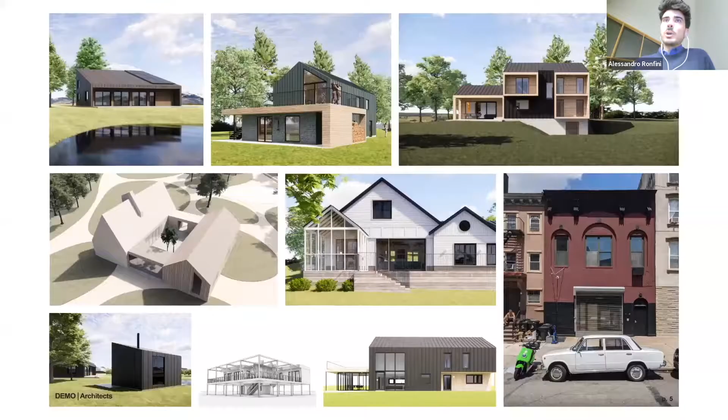So Demo Architects, we have a lot of projects, but for the most part, except for my house and another house, they're still in construction, because as all of you architects know, it takes a lot of time to actually build a portfolio of built projects. Having started in 2019, 2 years are definitely not enough. But we're working on a lot of interesting projects and passive houses right now, for the most part in upstate New York. So it's very exciting, future looks bright so far.

So this house - in 2017, my wife and I decided to start looking for land and build a house. The idea was that we couldn't afford an apartment in New York City, nothing bigger than a studio. So we thought, why not look for land and build something bigger? It's an investment, it's going to be a fun project, and maybe one day we'll move there.

So after camping on the property for quite some time, and being Italian, I cannot not have my moka, even on a campsite. We finally decided where to put the house, and we finally conceived an idea for the house.

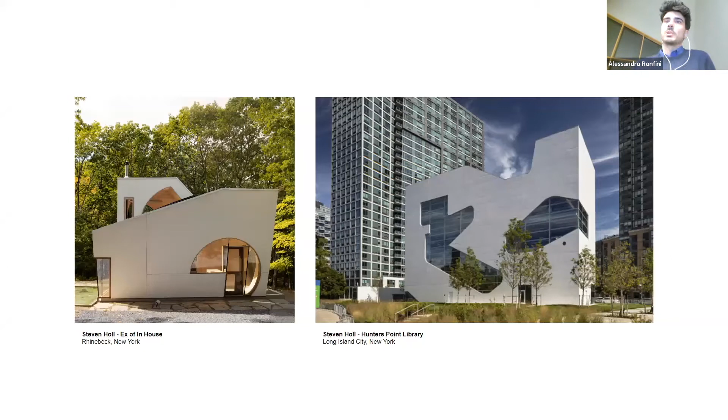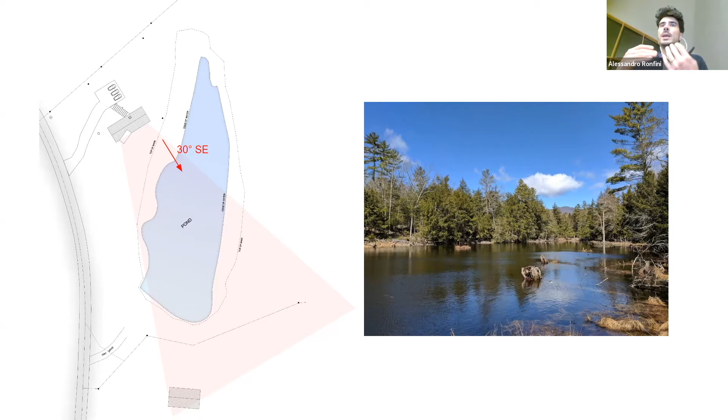So the idea for these carvings on the building was to actually justify them in a way that was relating the building to the site, and also in a way that could organize the interior and exterior space.

So the house is oriented 30 degrees southeast. It's kind of like the maximum angle we could put it at in order to still get some view of the pond and not miss out on the sun exposure towards the south.

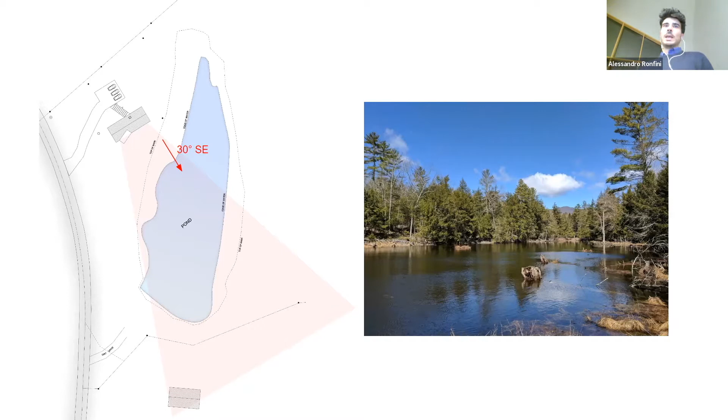At the same time, on the south here, the only neighbor is in sight, and of course they have a view of the pond there. So we wanted to maintain some privacy, still very far, but nonetheless we wanted to not point the view directly onto the neighbor's house.

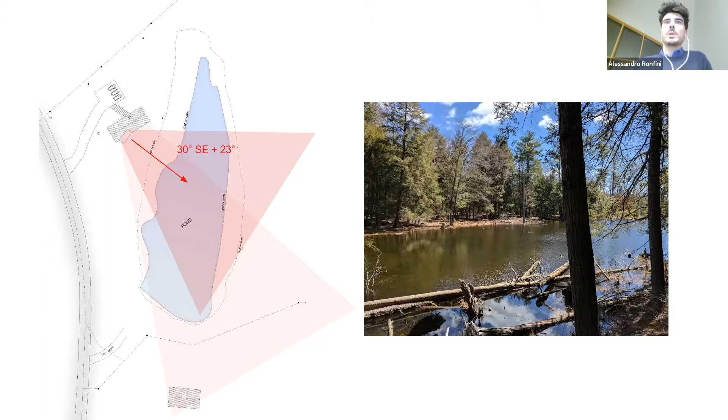So what we decided to do is carve out this wedge shape out of the house, out of this very simple volume, at an angle of 23 degrees from the actual axis of the house, in order to orient the view directly onto the pond, so that this interior space sitting on that side of the house can look straight out onto the water without seeing the neighbor and without the neighbor seeing inside the house.

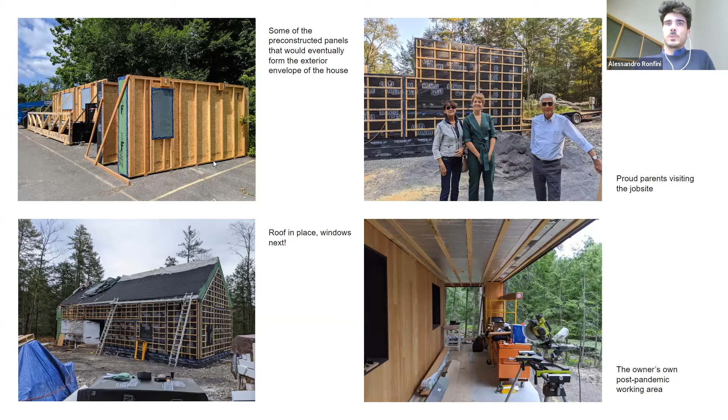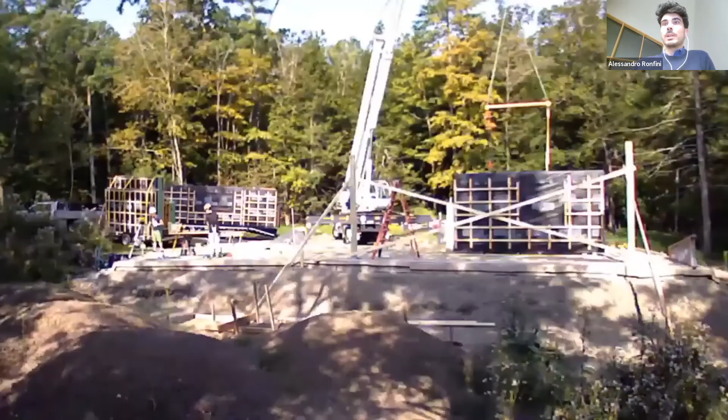I'm going to talk about exactly how they're detailed. So all the panels were built over the span of a couple of months, and then construction, for the most part—all the ground floor, and the second floor except the roof—was installed in a span of 3 days.

This is a camera that I set on site, so you can see the setting of the panels. It's not going very smooth, but it's happening. So all the panels, there we go, second day.

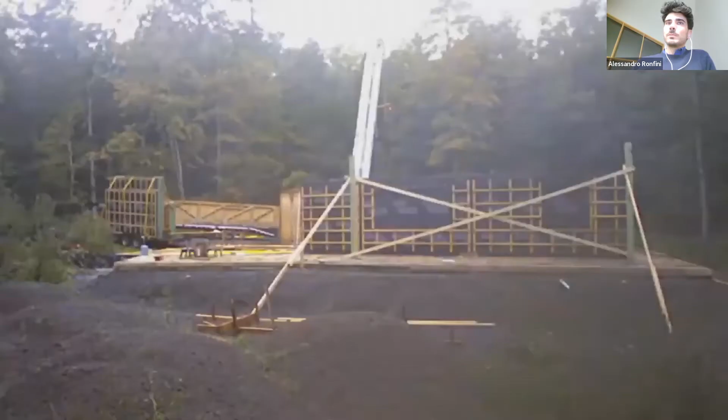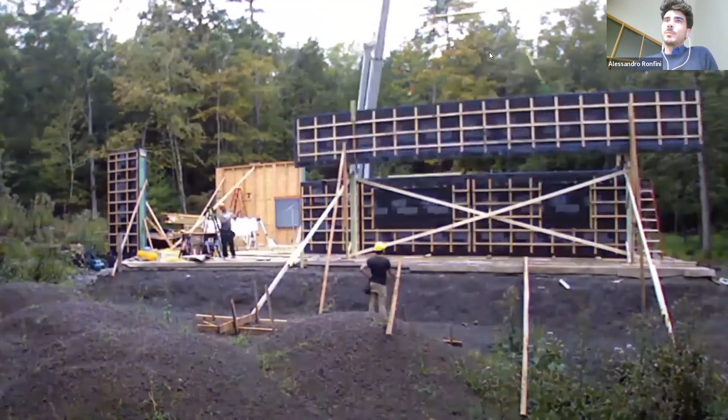Again, all the panels were prefabricated in Kingston, which is roughly 25 minutes drive from the project site. So really close by, not a lot of travel distance. Built locally in a way. And there you see the big beam over the porch on this side.

So onto the details of the construction of these panels. The panels are pretty standard, there's a lot of panels very similar to this. They are built with 2x4 interior structural framing, zipboard as an interior air barrier.

That's the use of zipboard—I know in the passive house community it's a little controversial. In this case, it was actually a good way of resolving the detail because it's both a sheathing and an interior air barrier. So it helps a lot with avoiding any risk of condensation on the exterior or in the insulation sandwich, and it serves as sheathing material. So there's no extra material that needs to be added on top of it. It was cost saving and performance that drove that decision.

TJI outriggers—this house is kind of pushing the limit of how small a house can be and still be certified passive house. This is just short of 1,500 square feet interior area. So the walls are really thick, 16 inches of dense packed cellulose. It's driven both by performance and by the risk of condensation. So both things were in place here.

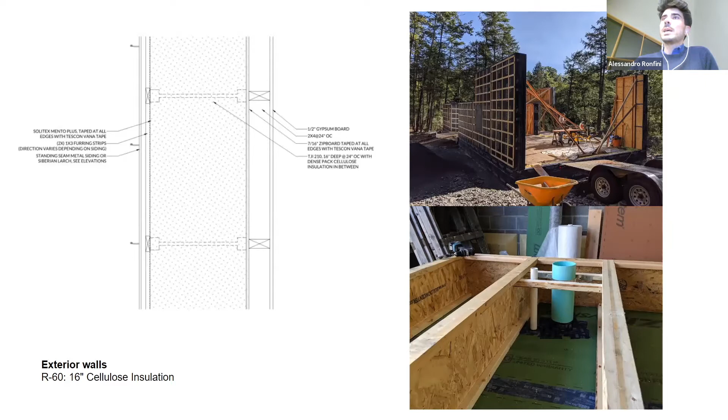And then on the outside, the Solitex Mento Plus, taped all edges, and then 2 layers of furring strips for the rain screen. The siding is a standing seam metal siding on most of the exposed surfaces, and everywhere the house is protected is Siberian larch.

For the roof, also because of the R value we had to hit, we decided to put exterior insulation in this case, so as not to oversize the joists on the interior and create additional structure that was unnecessary.

The rafters are 12 inch I-joists with dense packed cellulose, and on the exterior, again, zipboard as our interior air barrier. One thing I wanted to highlight with this picture is that it's not contained by your typical Intello or any interior air barrier, so it's allowed to dry to the interior. Once again, the zipboard is acting as the interior air barrier and as sheathing.

And then on the exterior, EPS, and on top of that, Solitex UM, which is a membrane with a mesh on top of it, so you can apply the metal roofing directly on top of that and maintain some circulation underneath.

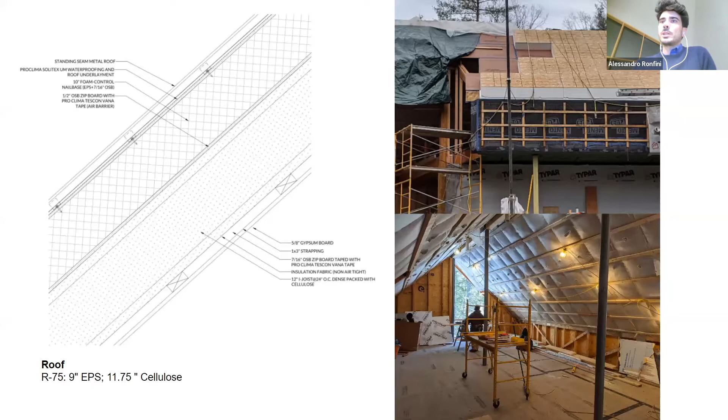The slab, finally—slab R42, sorry. The slab was all prefab EPS, I think from EasyFrame, EasyCore, something like that. So the whole pre-design was as simple as setting up construction with Legos, putting it all together, securing it in place, and then prepping it for the concrete pour.

The windows, another important component on the facade. The main element in the house is this big double height space with a big curtain wall. The curtain wall is a stick-built wood aluminum curtain wall, with wood mullions and pressure cap aluminum on the exterior. The windows are all aluminum-clad pine windows from Batimet from Germany.

These windows show a couple of things that unfortunately happened. The manufacturing was pretty good, but there were definitely some problems in some of the gaskets and how they were installed, so we had to fix that on site. Nonetheless, the quality of the window—and it's really hard to find at a decent price a welded face aluminum window—all the details in this were really great.

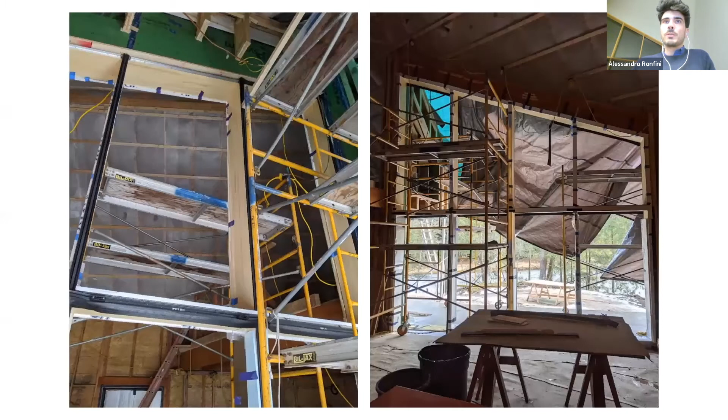So construction of the house, everything went relatively smooth until March 2020, when of course the pandemic hit, and there was a stop work order for most construction, or non-essential construction, in New York. So at this point, that's a picture from then.

So the interiors were kind of all wired, and all mechanical systems in place, but of course no finish on the exterior. We barely had started roofing on the opposite side, but not completed.

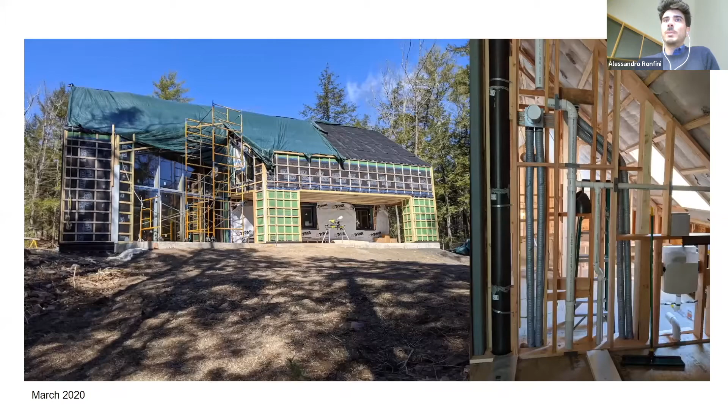So at that point, it was a lot of stress, but at the same time a very fun experience. We just asked friends to help, and my wife and I took on more work than we were supposed to. We were already planning to do some of the interior finishes ourselves, but we decided to do a lot more. So we did all the kitchen, we did the entire wood siding of the house ourselves.

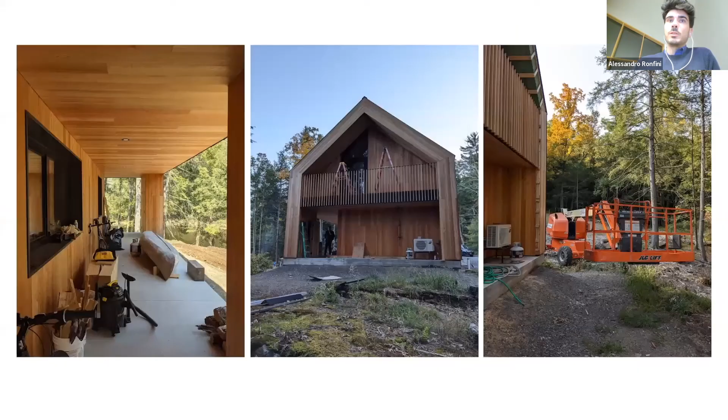We did the floors. So the siding was actually a fun experience. I have not really done a lot of woodwork, a few things, a few millwork fun projects here and there, but installing siding for an entire house is a different project, a little bit of an undertaking.

Had to rent tools like this guy here, but at the end of the day, it was fun. It was a great experience.

As an architect, I learned a lot by doing things — how to detail connections, what to expect and what not to expect in terms of tolerances, in terms of precision of the execution of the details. So even though it took much longer than anticipated and a lot more work and stress, it was definitely a fun experience and a big learning experience.

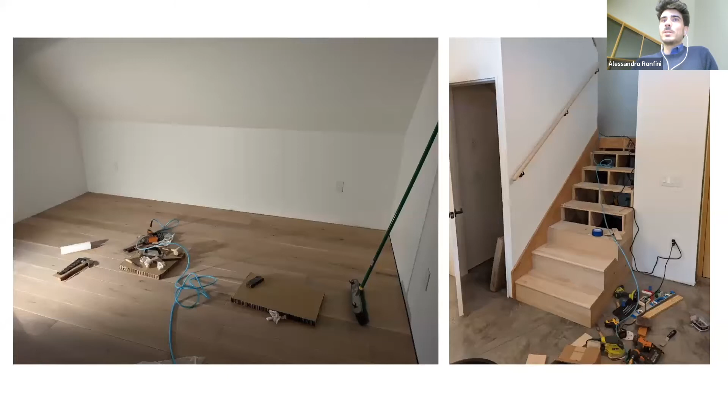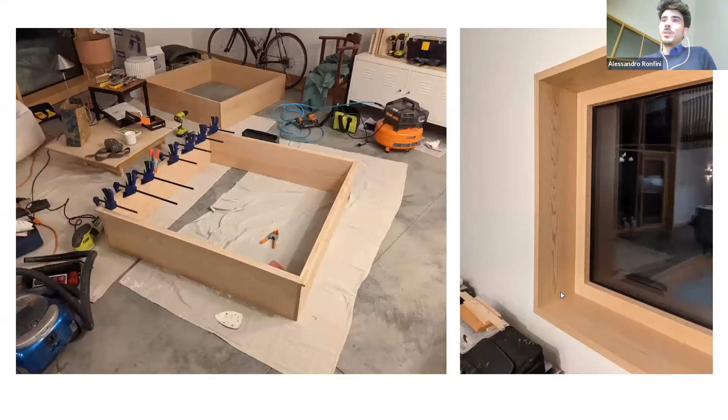The floors — please don't ever do floors yourself, or you're going to get very close to divorce. The stairs, I did those as well. Then we did all the casing for the windows. So this is all red oak.

Luckily, the couch was also very late, so we had all of the living room to ourselves to set up shop and build all of these boxes. We built them on the floor and then installed them onto the windows. Very proud of those. That was a fun project.

So here's the house, completed house. The house actually won at the latest PhiusCon the award for best project by a young professional. I was 35 at the time I started the project, but really the professional, and I have to credit him, is Owen O'Connor. He was the builder and the Phius rater, and he was 34 when we started the project, so under 35.

So the house is now finally complete. There's still a few things we're working on, some furniture missing here and there, but overall we're really happy with the result. It's been great as an architect to have a project that you complete, that you don't have to ask a client to visit with other potential clients. It's an incredible value, and this has been very successful in getting our company new projects.

On the interior, some fun things. This table, something that my wife and I designed, and the two legs here—there was an unfortunate mistake. One of the builders actually cut the ridge beam too short, one of the parts of it, so we had a 20-foot ridge beam. That was an expensive mistake for the builder, but also something they didn't want to bring back home, so we just cut it into parts and gave it to a friend who's a mill worker, and they used it to build the legs of this table. We still have some pieces that we're going to build more furniture with.

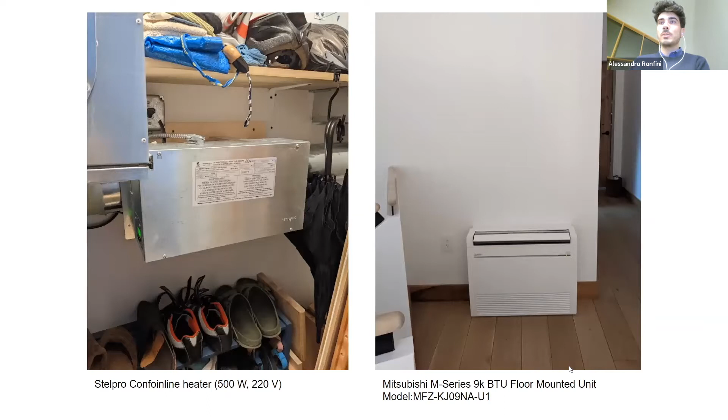In terms of heating and cooling, for cooling it's just one floor-mounted Mitsubishi mini split heat pump. It's 9,000 BTU, the smallest you can get, and still over-dimensioned for the system.

For heating, though, we also have an additional post heater, the Stelpro, that warms the ERV supply air to 67, 68 degrees, which is 4 or 5 degrees on average more than what comes out of the ERV naturally. That helps a lot keeping some of the rooms, especially the ones on the east and north, a little warmer in the winter.

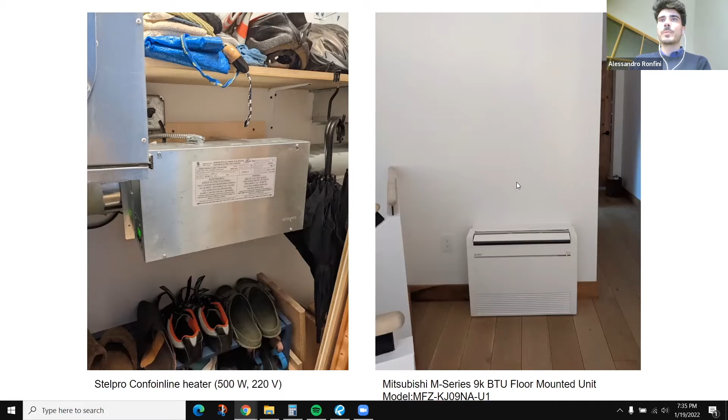For domestic hot water, that's another thing—remember, this is a second home, and it's pretty narrow in use. So after a lot of debate, I decided to go with a tankless electric water heater because I'm not using water all the time, mostly on weekends, and sometimes for a whole week. Even though there's a higher load when you're calling for hot water, in the long term this is actually going to be less expensive than even a heat pump water heater, because there's no tank that needs to be constantly filled and kept warm.

After the work was finally completed, sometime in May, we managed to test the house to achieve certification. We did the blower door test, and the results were great: air changes per hour at 50 Pascal was 0.27, with a target of 0.6. So really a very airtight house, especially considering how small it is.

Here's some data for the nerds on the call, the ones interested in all the details. We can go back to this and take a look if you have questions.

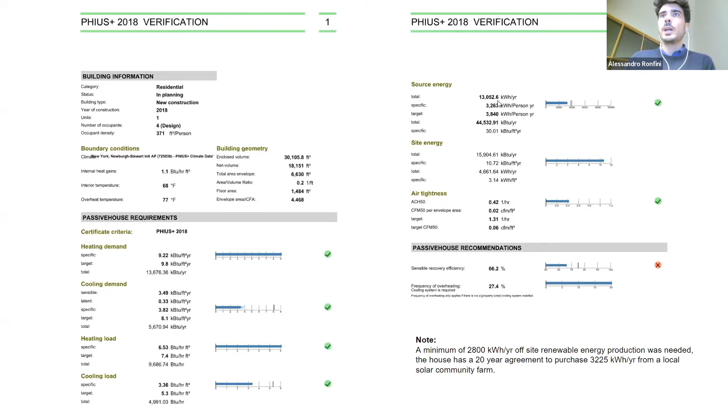So here's the data, and I wanted to point out some numbers. For example, the total source energy is 13,000 kilowatt hours per year. Since it's my house, I can see the bills. It's a second home, but I wanted to show the energy consumption of the house, even though I'm only here approximately 20% of the time.

For temperature, heating and cooling, despite no human load in the house, no windows open, and no shades dropped in summertime, the temperature was maintained over the past year. The house has had all mechanical systems running for a full year now. Temperature was kept at a minimum of 65 in winter and a maximum of 74 in summer, and you can see the consumption here.

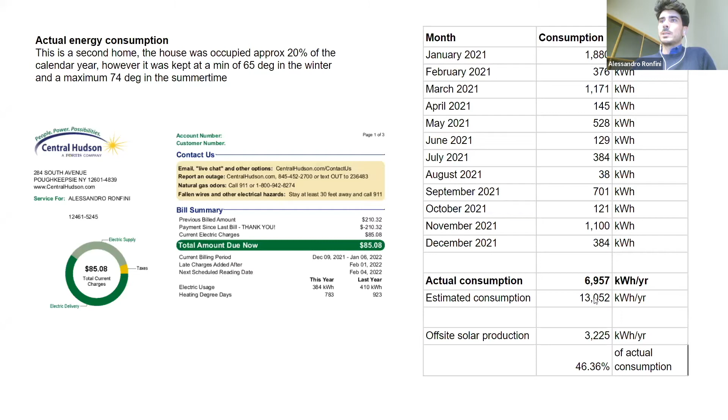As of 2021, actual consumption was just shy of 7,000 kilowatt hours, with an estimate of 13,000. 46% of that was actually produced with offsite solar production. So very happy with the result. Of course I wasn't expecting to hit 13,000 since it's a second home, but being at half that, it's a very good result, I think.

Another thing we all value in passive house is air quality, so I got myself a little air quality monitor. Not the best tool on the market, maybe not professional grade, and it's kind of annoying that it can't go back in time to extract data for just a month.

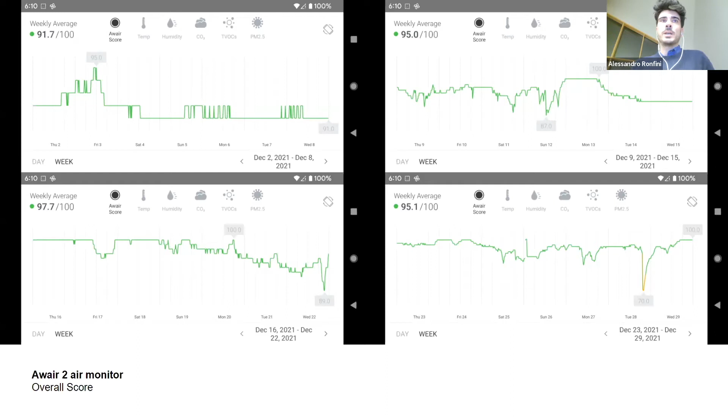But I looked at this past month, since I was here the entire month, and extracted week by week the data for the 4 weeks of December from the house. Here's the overall score, pretty high, minimum 91, top of 97. Of course there are always some peaks and lows.

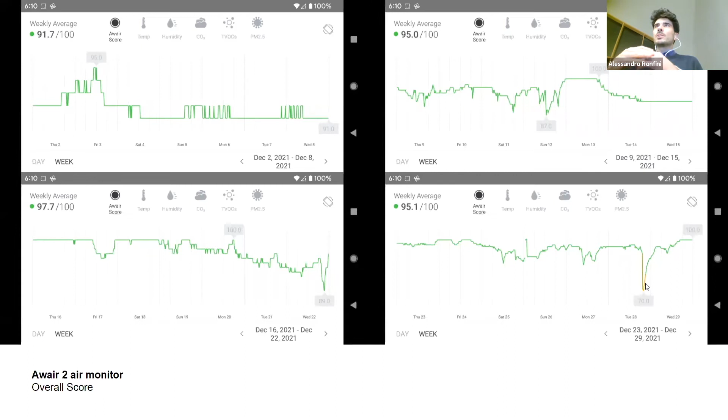For example, this drop to 70 might have been me cooking a steak or something like that. Small things like that can actually dramatically affect the value in these results.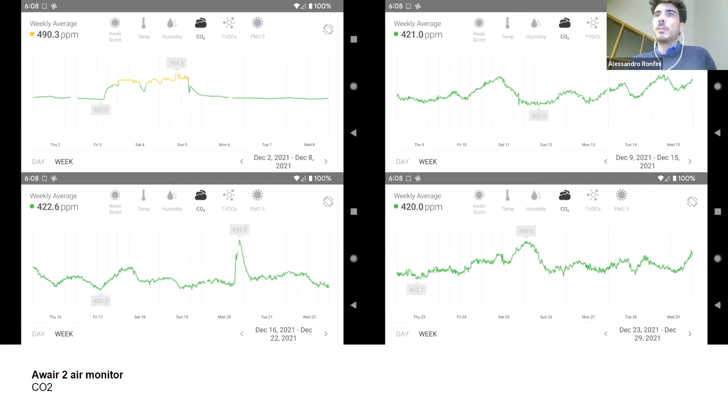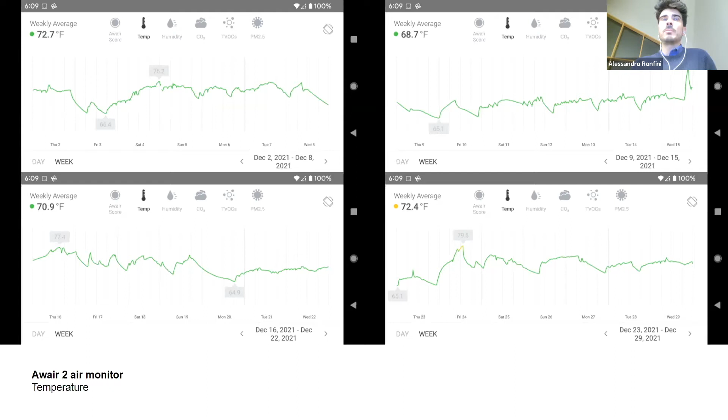And then the temperature - this is also pretty good. The median temperature oscillates a little bit, of course, but that also depends on where the sensor is located.

The data that's definitely not all green is the humidity. On average the house is dry in winter, and the reason is mostly because it's dry outside, and the house isn't always occupied - even though we're talking about a month when I was here - plus an all-air system to warm the house, which of course dries the air and creates slightly below ideal indoor humidity.

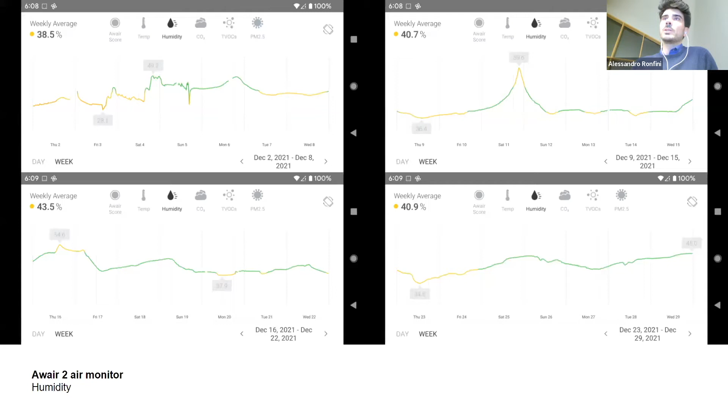So, some of the problems and lessons learned.

How am I doing with time? I have another couple minutes, probably.

Going good. Yeah, go for it, Alessandro.

There's a million problems and a million things I've learned in this house. I like to point those out to clients and say don't do it like that, that was a mistake. A lot of those are small things, like I should have had a bigger overhang over my entrance, and I maybe should have thought of a way of warming up the concrete at the entrance, because it gets really slippery when it snows and ice forms immediately on it. So a few things like that, design problems.

In here, I really wanted to highlight the passive house related issues that I encounter. None of them is a big problem, and actually I'm on the way of solving all of them, I think.

But one thing was definitely distributed temperature. The ERV alone, even though it was tested and calibrated - Zehnder, a rep from Zehnder, came here and calibrated the system - nonetheless there's definitely a difference in temperature noticeable between the rooms on the ground floor on the east side. The bathroom and bedroom here are definitely colder than the rest of the space, and in the living room, well, where we stay, we don't float in space, but of course on the ground floor it's a little colder than upstairs. If you go to the loft, you feel definitely a difference in temperature.

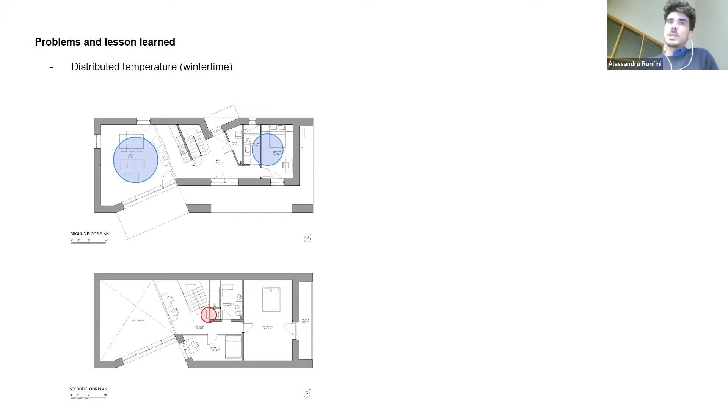So there's two solutions I'm actually trying to install if I can get this equipment, because as you know, supply is a problem everywhere. We're going to install a little electric radiator in this room, 500 watt, probably set at the minimum temperature, and it has a built-in thermostat, so it's going to turn itself off when we get to 72 degrees to keep this area warm.

This really is only needed, I would say, from early December to probably late February, so for 3 months. And then this is a plug-in, so potentially we can even just unplug it and put it in a closet, but it's really minimal, so it's probably just going to stay under the window.

We actually had a towel warmer in the bathroom that was supposed to do this work, and then for budget reasons, and because with the pandemic there were a lot of problems with the electrician suddenly having a lot of other jobs more interesting than this, we reduced it, we cut it out, and that was a mistake. We should have kept another source of heat in that area, because again, being on the northeast, it's definitely colder than the rest of the space. And the window being under the porch doesn't get as much solar heat gain.

In this area here, there was a very dumb mistake - we use a fan in other houses with double height. I don't know why... well, I know why I didn't put it, because I didn't want to see it, but that was a big mistake. Of course, we're going to put one now, and found a nice model, which is actually not this one. So it's here waiting for the electrician to install it. Hopefully that's going to happen soon.

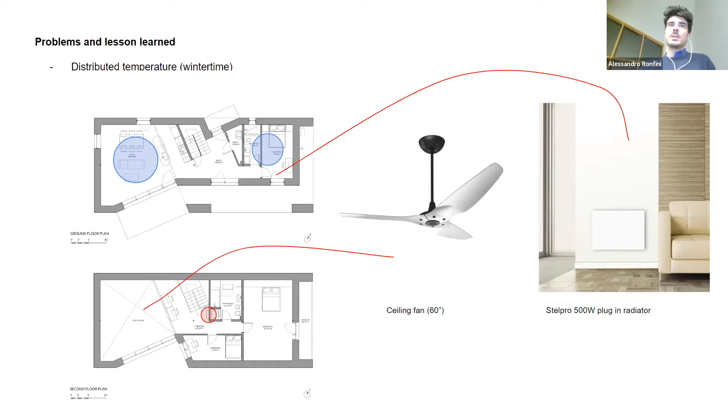Right now, I know this is going to work, because right now I have a very simple tower fan that I put on the loft, and that's enough to actually create air circulation to bring that warm air from the heat pump into the entirety of the space, so that the median temperature is 70 degrees, and there are no problems.

Another thing that's not really an issue, but something that could be improved, and something I'm definitely trying to do differently in the next projects, is the range hood. I have a very simple Elica recirculating range hood. It's cut out, but it's under here, sucks the air, and there's a little exhaust at the top, so it just recirculates the air like that.

Whenever I cook something like a steak or anything smelly or humid, even cooking pasta, I turn the ERV booster on. The Zehnder has a booster that increases the capacity and fan speed, so more air is extracted and more air is brought into the house.

While this helps keep the smell low and cleans the air pretty quickly after cooking, there's still a lot of humidity and condensation. If you're boiling water, condensation happens underneath because the fan isn't strong enough to pull it out, plus those pollutant peaks I talked about earlier.

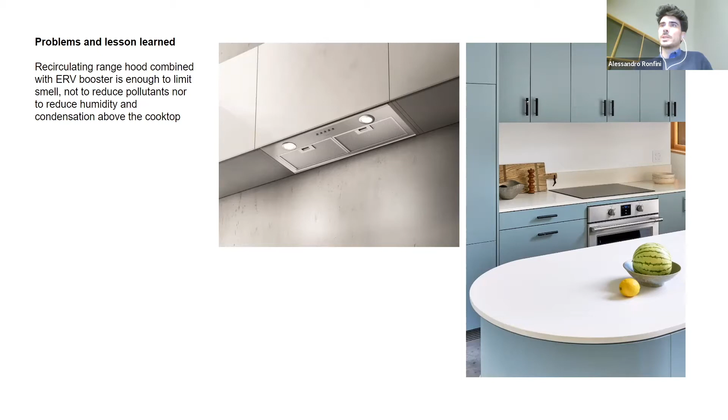So for the next house, especially one where a family is supposed to live full time, probably a fan that exhausts to the exterior is a better solution. And I know Dan agrees with that.

Another thing is the humidity level, which I talked about earlier. In the winter, the house is pretty dry. Now, for when I'm not at the house, I don't really have a solution, but I don't think it's a big problem. We're talking about less than 10%, around 5 to 7% less humidity than comfort level.

When I'm at the house, the solution is very simple. We have a couple of these - it's actually a diffuser, but it works perfectly as a humidifier that we run at night. At night is really when you're not taking showers or cooking, where humidity actually drops, because the heat pump is running and the air gets warmed and dried. So we just have a couple of these in the bedrooms, and that's enough to really feel the difference.

I don't have a sensor for the humidity in the bedroom. I might move my Awair sensor there just to test it and see if this actually, beside what I feel, corresponds to an actual comfort level much better than what I have right now.

But it's a pretty simple and definitely very inexpensive solution. This is $100 versus a humidifier for the whole house that runs in the thousands of dollars.

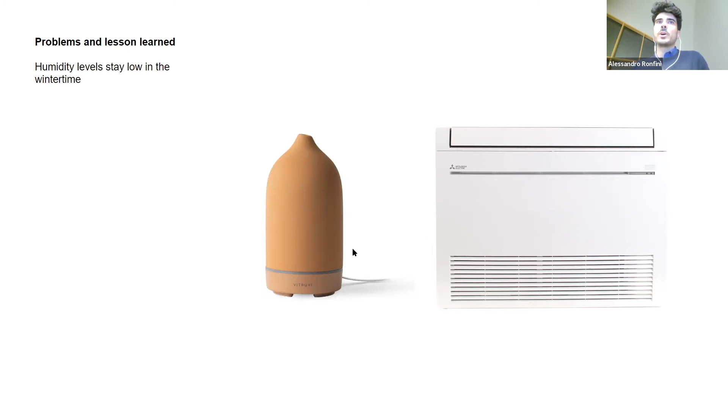And that's it. I forgot to mention this little guy - this was a great help during the construction of the project. This was our stress release, Spanky, a little donkey living next door. Great friend, helped us a lot during the construction, keeping our mental health in place.

Great stuff, Alessandro. Well Zach, why don't we go to you first for sponsors and updates, and then we'll go to Bev and then go to questions. What do you think about that?

Yeah, that sounds great. Alessandro, that was fantastic. Thank you. And I know there are a good number of questions, so I'll try to keep it brief here.

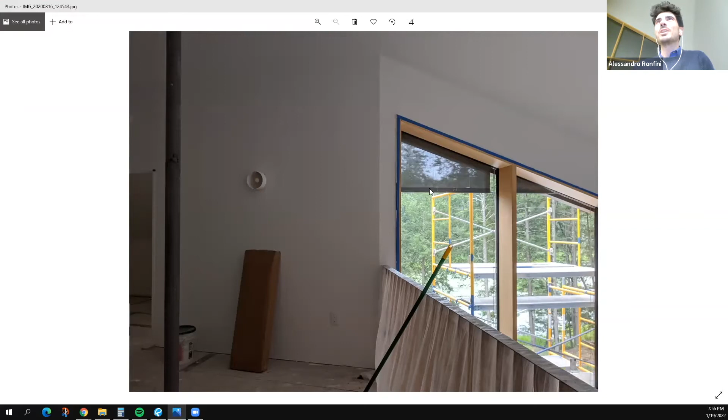Yes, I saw there's a lot of questions on the shades. I pulled a couple of pictures, let me show you, just so I can prove that they actually work. Not that I don't believe you, just so you can see them here. These are halfway down from the interior. When they're all up, you don't see them, they're completely invisible. They have a cable track on both sides, you can set the stop, so this stops right above the door. I have another picture where you see them — see my wife and the shades outside here.

So the shades, I don't remember the brand honestly, nothing super fancy, pretty standard shades for a porch. They're just narrow, generally these are much wider. So yeah, I don't recall. They're exterior shades, they run on the exterior, designed for that. They're motorized, they don't have any app. I don't know if by now there is an app that can control them, but I just use a simple remote control with up and down buttons when I need them.

We really designed them in there because the land is pretty clear in front of the house, so that helps reduce overheating in the summertime because of the orientation of that facade anyway. You've probably seen the numbers—consumption of energy in the summertime is really low. The air conditioning is barely running.

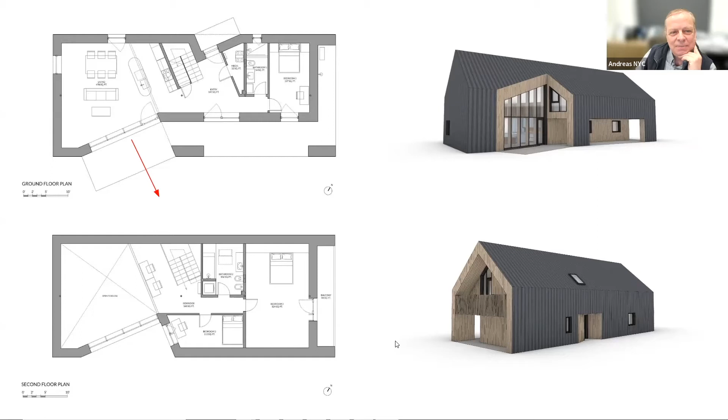Yes, well, the house—I haven't talked too much about that—but there's always an aspect of light and views that's really important. This is the main view looking out this way. As you enter the house, you have this window facing the pond, so you get a direct connection of what expects you, even in a smaller space, which then opens up to the big one. In here, there's no direct connection to the exterior when you enter, but when you're in bed you get this framed view of the exterior, and it's really nice just looking outside the window. In this case, the bed is under there because it's a low, pitched roof.

It's a pitched roof, right? So it's still 3'6", enough for the bed to go against the wall. And in here you get some nice light in the morning, facing east.

None of the bedrooms—one thing that's also different from Italy: if anybody's been to Italy, you know there are shutters on the windows everywhere, whether roll-up or the wooden ones outside. Growing up in Italy, I used to just close the shutters and sleep, and it's dark—whether you wake up at 11 in the morning or 6, it's still dark. So I intentionally didn't create too much light; it's basically the bare minimum in the bedrooms to improve comfort and the ability to sleep.

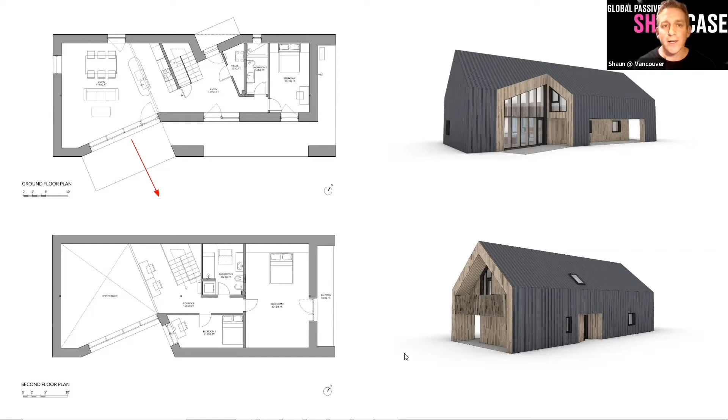Mr. Scott Kennedy, you got a question? I don't think it's so much a question—it's this whole question on the ventilation of the kitchen exhaust. I do know there's a wonderful unit being manufactured here in Vancouver, but it's talking about north of $2,000 for it.

So it's not going to be very easy to get into a lot of projects. I'm building a little duplex, hoping to build it for my sons, really small. But it is that question of how we ventilate the kitchen, since they both like to cook, so I do have a concern with however we do this.

So I'm wondering, you said you would go to an exhaust fan next time around—is it because you're not capturing with this hood, or is it because the hood's not cleaning it properly?

Well, I think there's a few things here. This is an induction cooktop, so that's already a dramatic improvement over 90% of American houses that have gas. There's no pollution because of combustion, and that's just one great thing out of the box.

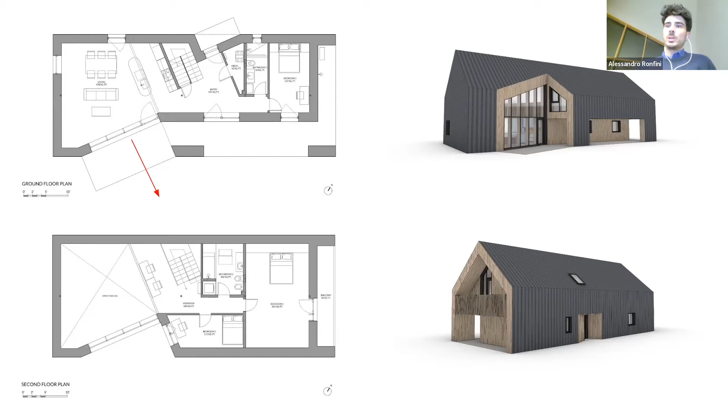But nonetheless, you still have some pollutants when you're cooking, and you have smell. So the solution I have is I put, pretty close to the range hood, the intake for my air. So there you go, this is the air intake.

The booster button for the ERV is right in the kitchen. Every time I cook, I know I need to push that button, and that extracts more air and cleans it up. That doesn't remove the smell though - if I cook something stinky, say boiling a cauliflower or cooking a steak, it still stinks in the room, but it cleans that smell pretty rapidly after I'm done cooking. The pollutants are another story.

Because it cannot be too close - you see this radius, this is the 10 feet, the 5 feet radius from the range hood that this needs to have, both the supply and the return, in order not to unbalance the system. Because of that, it cannot capture everything, especially because you're right on top of it. If you're stirring something or flipping burgers, you're just breathing those pollutants, and that's when an exhaust or range hood that vents to the exterior will probably be better.

I'm not concerned much about this because it's a second home, I'm not cooking here all the time. But yes, for a primary residence, I would definitely consider exhausting.

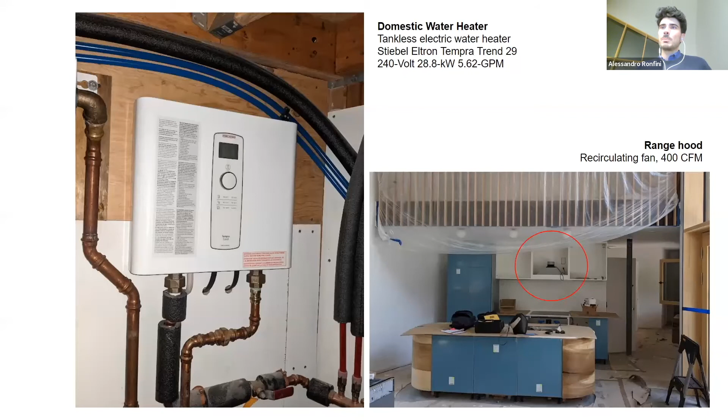Luckily, both my wife and I are tall, so I wanted to have everything aligned, that's why it's kind of invisible in there. Everything is aligned so you can reach the cabinets. We have a little step stool for the higher ones, and this is enough clearance to work without any problem. There's lights underneath there, so it's a nice and clean look.

This is kind of where my sons want to go as well, only with the window behind the counter. But I'm just trying to think of whether we should get those cabinets a bit lower to help that capture.

I've been talking to the guy who's designing this fancy range hood here in Vancouver, and he's actually designed it so it's got an air curtain that comes down and extends the effect of the hood, with a very low air curtain, washing the front with another piece of air - but it's very, very expensive. It's got 3 filters: the steel filter, another filter, then a carbon filter about 2 inches thick, and it's a beautiful looking thing.

And he did say the steel filter is the most important one because that's what captures the grease, and you need to wash it regularly - put it in your dishwasher. He says you should actually have 2 sets of grills, put one of them in your dishwasher every week or so and keep it clean all the time.

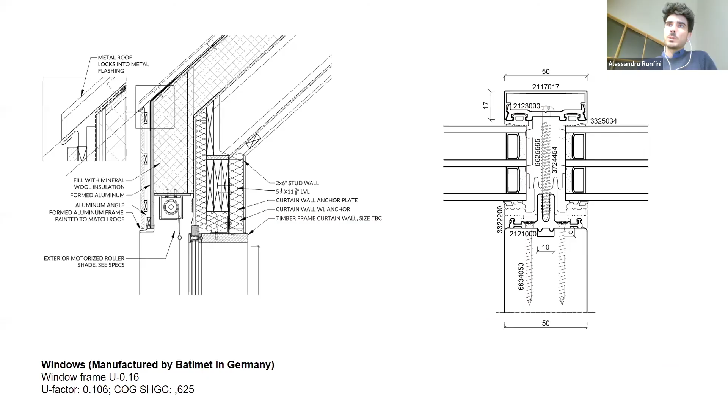And I have one of those cone shaped pre-filters on the intake. If you've ever seen a Zehnder system, you know what I'm talking about, it's like a little hat that goes on, like a mesh system, and that captures dust and things like that. I change those pretty frequently, also because every time we do some work, maybe cutting some wood inside the house for millwork or things like that, they get clogged with sawdust. I have never felt anything oily on those, honestly. It's just the carbon filter that catches that. So I haven't seen any problem, but there is a pre-filter on top of the filter.

Thank you. Yep, great question. And Barb, thanks for some of those links and comments. I got some reading material to do on the side here.

Sorry, I got distracted trying to find an article for Joshua and reading chat here. Last one I think we have is, oh, that's me.

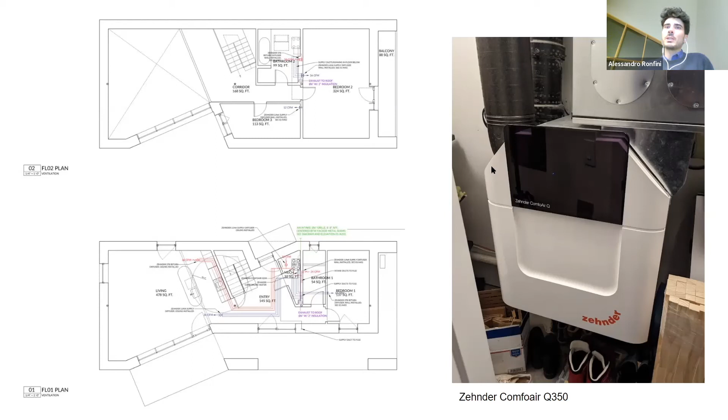Yeah, it was, in hindsight especially, a great learning experience. While doing it, sweating, not having water hooked up, things like that, that was stressful. But again, I learned so much, and I would recommend it to every architect to learn in the field by doing.

Well, again, the details look great. So maybe we don't get to see the fine details of the work from pictures, but from the ones you posted, it looks great.

Somebody just asked about another indoor air quality monitor, and I can't name it. I think there's another one called the Aranet 4 that's more portable. If anyone recalls that name, can you throw it in the chat for Scott?

I quite enjoy the Awair. The one thing I've learned, and I think I've said this many times on the show, is when I'm in my office through all the Zoom meetings, after about an hour I'm like, oh, I'm tired, and I start yawning. I look over at the thing, and the CO2 is above the limit. I'm like, oh yeah, I don't need a coffee, I just need to open up the window or open up the door. So it's fascinating what that data can tell you.

All right, well sir, thank you for showing your amazing home. I wish you and Daniel the best of luck. Can't wait for you to come back to talk about some of your next projects.

Thanks, Zach, for putting the Aranet 4 in the chat. That's great, I want to get one of those too, just so I can put it in the car and do different things that I can't do with the Awair. It's just great to get data on air quality for all the different things. It's great stuff.

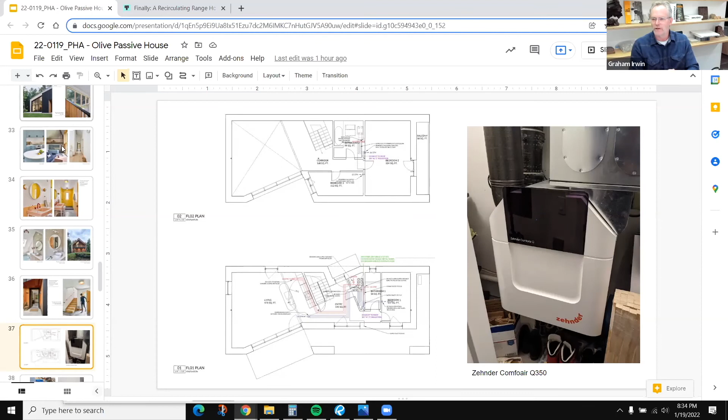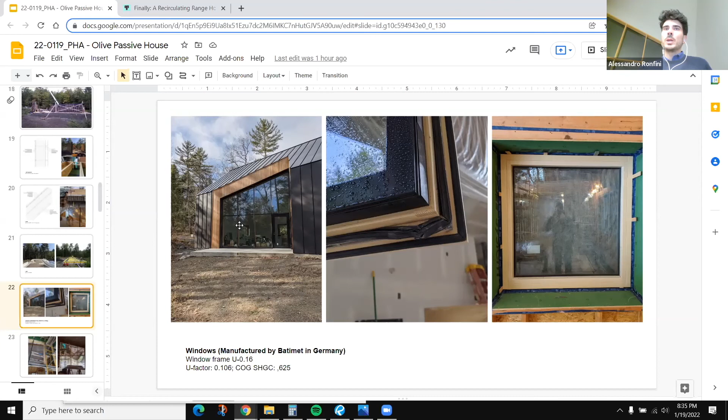Yeah, yes. The curtain wall, and I show some details here, this was all done by Batimet, but really what it is, and it's the same, pretty confident it's the same for Zola, has exactly the same system. Icon, Neufer, all the usual brands have basically the same thing. What it is, it's milled by a local mill worker, wood mullion, and then all the aluminum hardware is bought from Schüco, so it's all standard extrusion from Schüco, and you'll see exactly the same detail if you look for the same system from Icon or Zola, etc. It's the same. There's a couple of different pressure caps, beauty caps you can put in there. There's even an option of structurally glazing this, but good luck finding somebody able to structurally glaze it in upstate New York. So this was the system that we used.

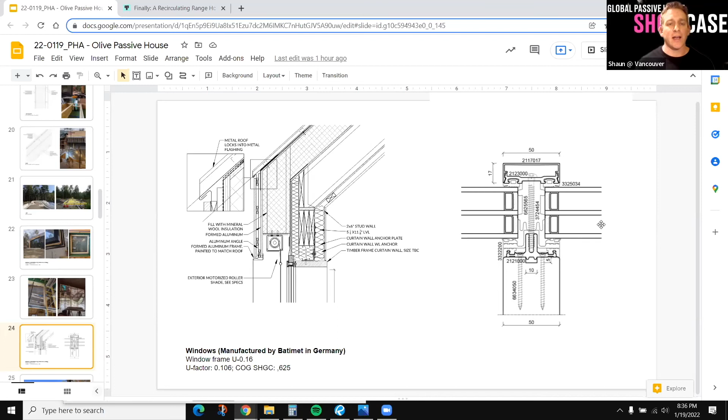It's a bit of an interesting hack with tying in HRVs to a Rheem heat pump, where in the wintertime when you've got the Rheem dumping cool air in your system, how you could tap it into your ERV to help out with either cooling or heating. If anyone's thought about that bit of a hack, tying in your HRV or ERV to the exhaust of your Rheem heat pump system, because you have that heat pump in your mechanical room and it's dumping heat or cooling, has anyone thought about tapping into it in your passive house projects?